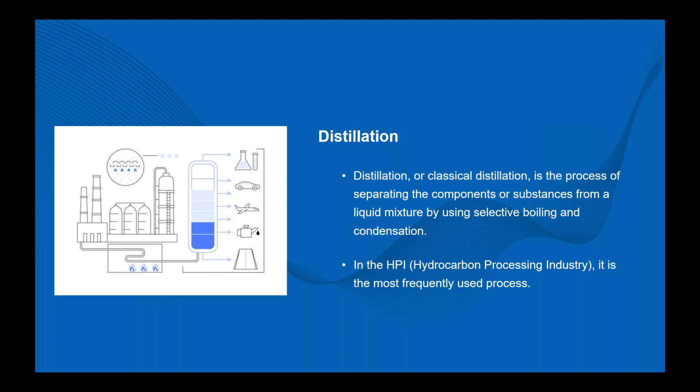It's a separation technology, separating a liquid mixture into more or less individual fractions based on selective boiling points. And if we look at the industry that we focus on, we call that the HPI - hydrocarbon processing industry - oil and gas refineries, test laboratories, etc., then this is the main process used.

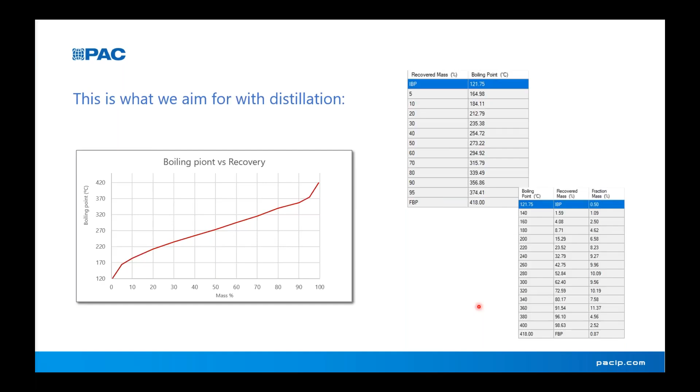If we look into online, then SIMDIS - different ways to write SIMDIS - basically it is simulated distillation. People name it SIMDIS, people name it SIMDIST, whatever, it's all about the same technology where we do a boiling point distribution, determination of that by using gas chromatography.

The concept is based on the assumption that components elute from a column, a GC column, in boiling point order. That's one of the basic fundamentals of chromatography - separating by boiling point is one of the ways of using chromatography.

To get SIMDIS data, you need to introduce the sample in the GC, and we use a specific injector for that, more about it later. Then a separation on a column, detection using a flame ionization detector, and then you need to get a relation between retention time and temperature - that's in the next slide. And from that data, you get the boiling point distribution.

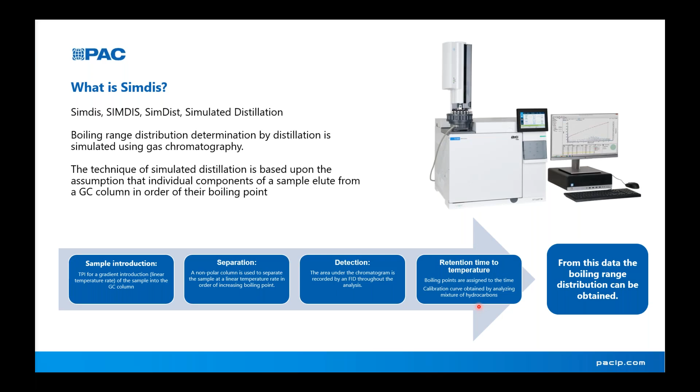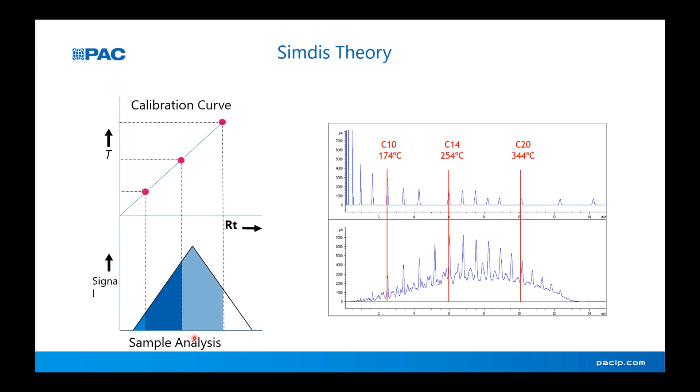So if we relate that to a mixture with normal paraffins where we know the boiling points, like here for C10, C14, C20 as examples, we know when they elute. Then you can change your time axis into a boiling point axis. That's graphically represented here, and then you can change your percentage to retention time into percentage to boiling point. That's the whole thing you want to do in distillation, as I've shown in the earlier slides.

As an example here, a typical SIMDIS report of a diesel with some FAME in there even. So what you see is your sample, and then the retention time - but that retention time is related to the boiling point, and from there you get your percentage versus boiling point. This is the whole concept of SIMDIS: introducing a sample on the GC column where it elutes in boiling point order, and you get the area of that fraction, take percentages of that total area, and relate it to retention time, and from retention time to boiling point, resulting in a report like this.

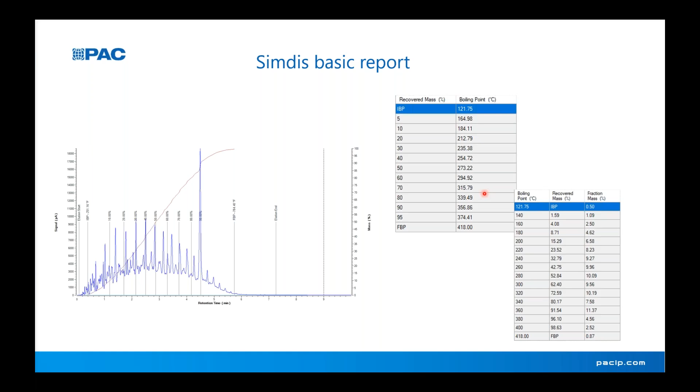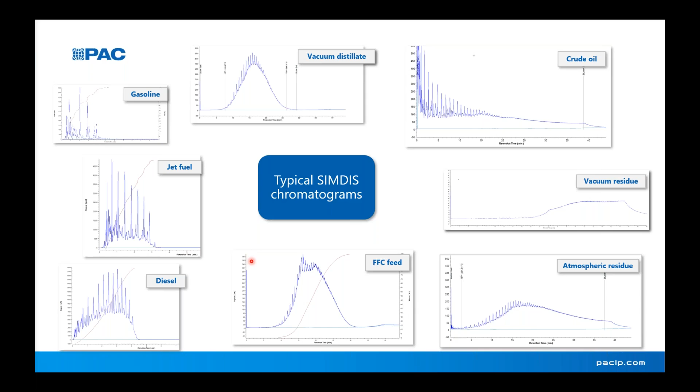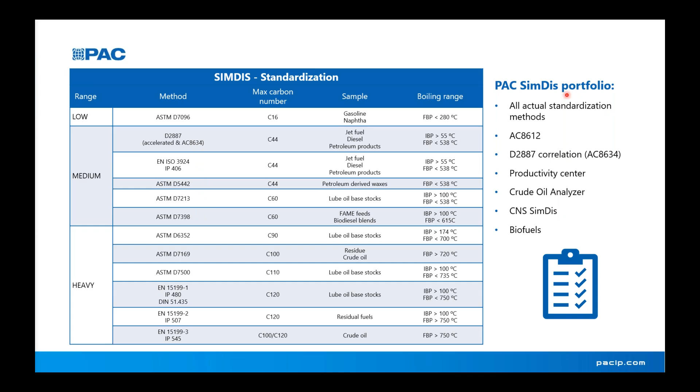Basically the difference is the type of columns used to get the separation of these components - what we call high temperature SIMDIS, typically used for heavier products, and low temperature SIMDIS for lighter products like gasoline or jet fuel. Same principle, the only difference is the thickness of the stationary phase. With a chromatography background you can imagine that heavy components, if introduced on a thick stationary phase, will take a long time to come out, if not too long or not at all. So for high temperature SIMDIS, we use a thin stationary phase, and for low temperature SIMDIS, we use a thick stationary phase. That is the difference between all the methods, and of course the oven temperature programming.

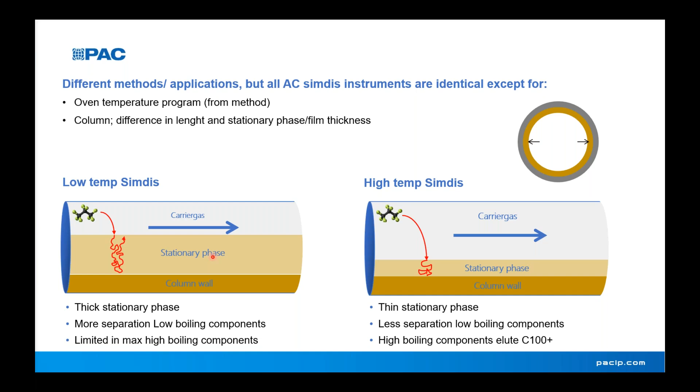Looking at typical columns for that, you see here typical examples of the film thickness for high temperature SIMDIS - a relatively short column with a very thin stationary phase. And for low temperature in the gasoline range, a longer column with a very thick stationary phase, with the mid-range in between.

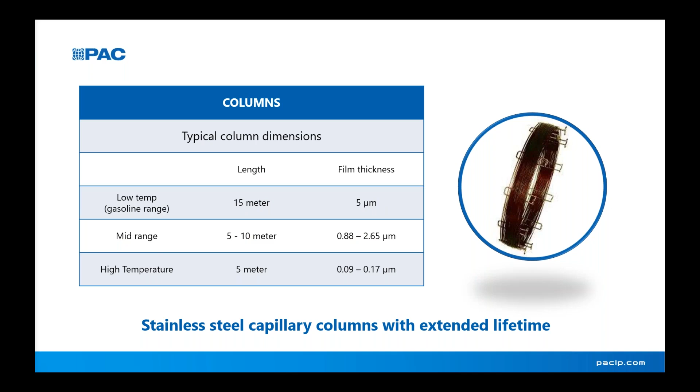To do SIMDIS, what do you need for that? Well, basically three things. Hardware, being a GC with an autosampler for the sample introduction.

The GC is configured with a specific inlet to introduce the sample in such a way that there is no discrimination for light and heavy components, that residual components like asphaltenes stay in there, that it can be used for solvents like carbon disulfide, which is typically used in high-temp SIMDIS. PAC uses for a long time already the TPI, the temperature programmable inlet, which is around for decades already.

Second thing is the non-polar boiling point column, which separates on boiling point, and then an FID, a flame ionization detector detecting what comes out of the column.

Second thing you need is software to process the data coming out of the system. First of all, you need a chromatography data system, that can for example be Agilent OpenLab or Agilent ChemStation. In addition, some dedicated software, SIMDIS, to calculate the boiling point distribution and a whole lot of other parameters from that, and report it as we have seen in earlier slides.

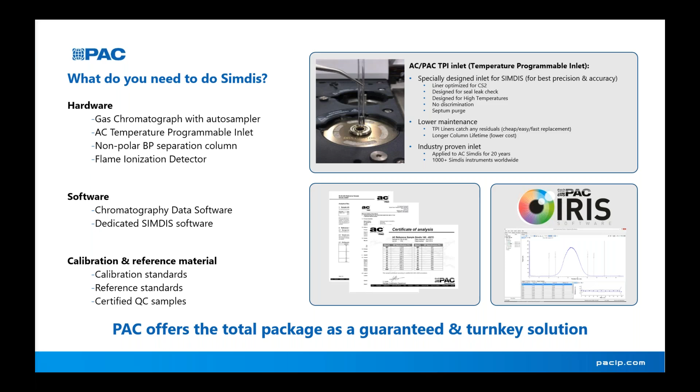Very briefly about the software. It is what we call work-oriented and workflow-optimized software, where basically everything from the moment of sample introduction, which you introduce into your chromatography data system, you start your analysis, and everything afterwards can be done automatically - from importing it in our software, calculating the results in different ways, generating a report either as a PDF or CSV file or whatever, and even exporting the results to LIMS. That can all be done automatically.

If you prefer, you can do these steps manually as well, partly or everything manual or everything automatic. We offer our software as a standalone configuration, so a computer next to the GC, or in a client-server environment where all your data and methods are stored on the server, and you have clients from where you start your sample analysis, process your data, etc. So standalone or a client-server configuration.

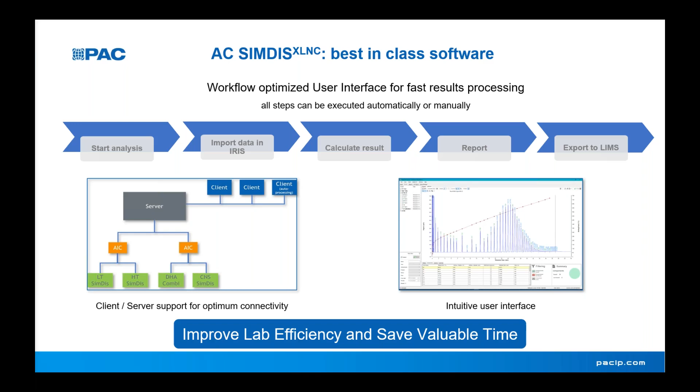So far then about what is SIMDIS. Let's look into a bit more detail about the applications. There are many applications, many ways where and how and why you should use SIMDIS. I'm highlighting 5 of them over here.

The AC8612/34, which is SIMDIS not only reporting the carbon distribution, but also the sulfur and nitrogen distribution. For example, high temperature SIMDIS for residual products like atmospheric and vacuum bottoms. Also high temperature SIMDIS for biofeedstocks and waste plastic pyrolysis oil and all kinds of other bio and petrochemical type applications. And crude oil SIMDIS. Now, these are just a few examples.

We only have, let's say, one hour today, so I'm going to talk about these 3 highlighted here: AC861234, high temperature SIMDIS for residual products, and high temperature SIMDIS for bioproducts and pyrolysis oil. So let's look at AC8612 and AC8634.

The AC8612 is, well, to be honest, it's not a SIMDIS. It is a dedicated application in our DHA, Detailed Hydrocarbon Analyzer, software, where we calculate the boiling point distribution, and that's why I included it in this presentation.

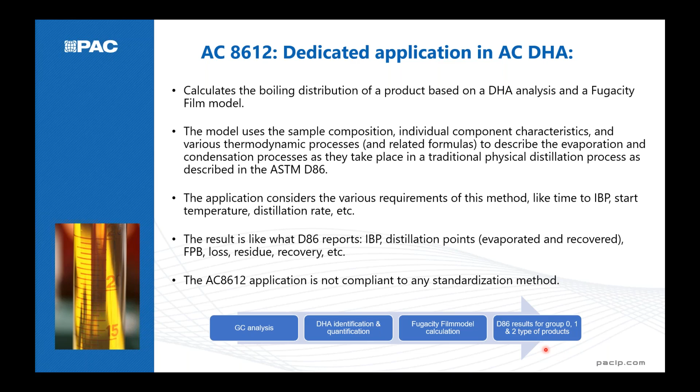To summarize, what you do is GC analysis to separate, identify and quantify the individual components. From that, together with the physical properties and the model, we calculate the boiling point distribution according to D86, or the European equivalent, the 3405, for group 1 and 2 type products, so gasoline, naphtha type products. From that you get the boiling point distribution, boiling point versus volume percent, or the other way around.

You can have certain cut points. You can report evaporated or recovered data, all in volume percent of course. It reports the loss, the recovery, the residue, the Reid vapor pressure, time to recover, the 5 mil, etc., all as requested by the D86 method.

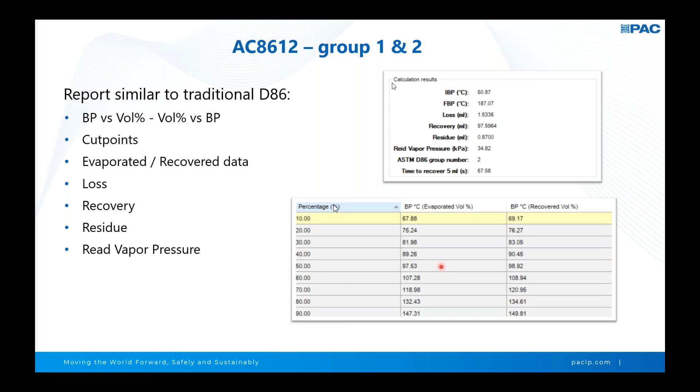There's a comparison to the D86. Here are some results from the 8612 and the D86 data. What you see in this graph, the light blue is from the AC8612 and the dark blue is from the D86 itself. As you can see, there is hardly any difference.

Same for this kind of product, even for a gasoline with ETBE. You see there's a perfect match for the data.

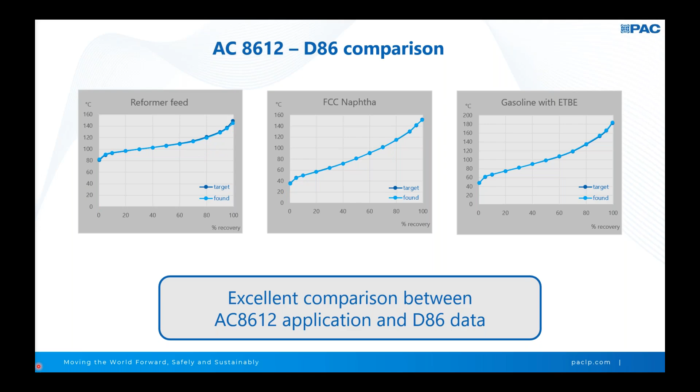The other application, 8634, is different. It correlates SIMDIS data, mid-distillate SIMDIS data, into the D86 or ISO 3405 methods. So it's correlating SIMDIS data, whereas the 8612 calculates data for the composition.

The AC8634 is, well you can already guess, for group 3 and 4 type products, like jet fuel and diesel, and it is based on a correlation as described in the ASTM D2887 methods and also in the ISO methods. There's an older correlation called STP 577, which was updated years ago into this new correlation that we now use in our SIMDIS software.

What you get from that is, I would say, exactly the same chromatogram from SIMDIS and the D86 data based on the correlation with volume percent versus boiling point, also some cut points. What we do not report here is time to IBP, the residue, the loss, etc.

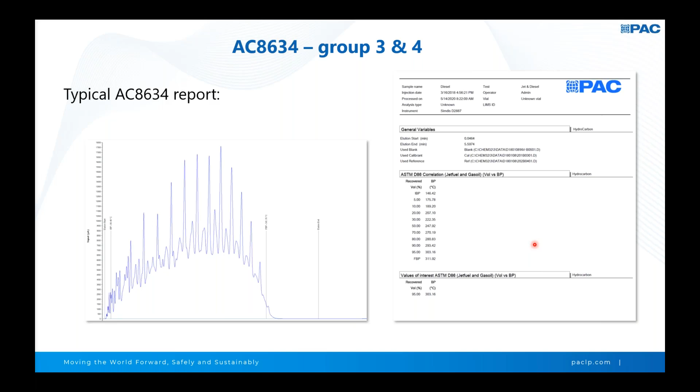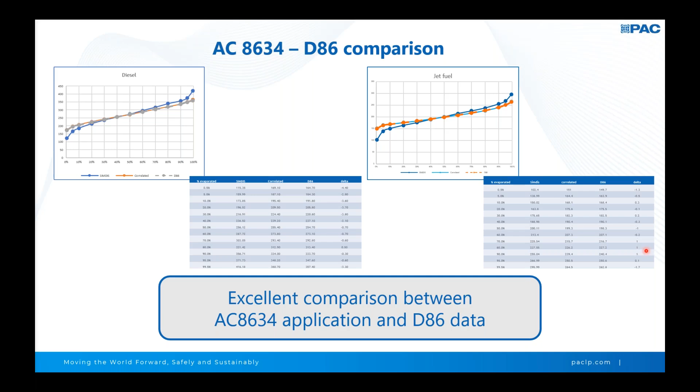The difference might be small numbers, but in general, specifically in the middle, it's less than 1 degree or max 2 degrees. If you look at the jet fuel, you see that it's very narrow. So a very good comparison between the methods.

To summarize these two applications, they are an alternative for the D86 or the ISO 3405 analysis. The nice thing is you can automate this on a GC. You can run a sequence, multiple samples one after another, roughly 4 to 5 samples per hour unattended, versus physical distillation where you continuously have to change your flask and sample, etc. The AC8634 is listed for the jet fuel and diesel spec as an alternative method.

If you look at the jet and diesel spec, you will see that it's saying that the correlation data can be used to certify products like jet fuel and diesel.

Another nice thing is that these two applications can nowadays be combined in one GC, one channel for the 8612 and one channel for the 8634, which gives you a very high sample throughput, far more than what you will get with physical distillation, and all automated.

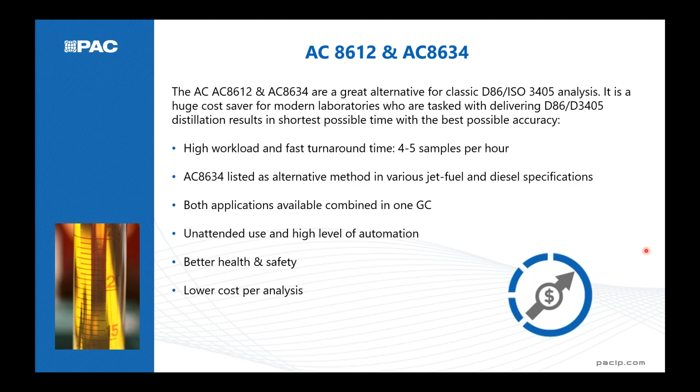Let's go to the next application, high temperature SIMDIS for residual products. You can use high temp SIMDIS for many different products, varying from crude to FCC feed, etc. For the coming slides, I would like to focus on residual products and explain a bit more about that.

But when we talk about high temp SIMDIS, what are we talking about? It covers the simulated distillation analysis of products with a relatively high final boiling point, typically beyond C60, 620 degrees. That's roughly where we say from there on we call it high temp SIMDIS. You can report up to C120, 750 degrees, depending on the methods you use.

It can be that your sample has components with a boiling point even higher than C120 or C100, and that would mean we talk about residual samples, which I'll explain in the coming slides. But the concept is that you only report up to the last point of calibration.

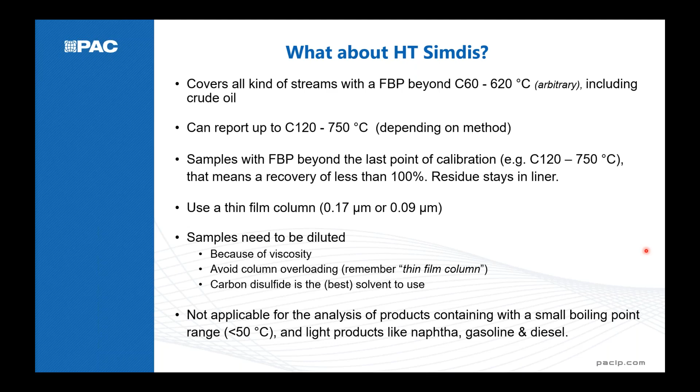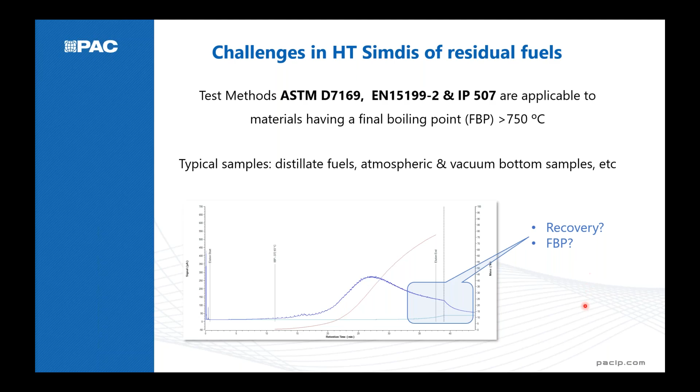What are the challenges with the final boiling point? We said in the beginning that SIMDIS is based on taking the total area and distributing that over its boiling points, over the percentages. But by definition, you will have a start and an end. As you've seen in the previous slide, there is no end - there is still sample eluting at the end of the analysis, although not much, but there's still something coming out.

That means you will not have 100%. By definition, the final boiling point is set as equal to 99.5%. So if you do not have 100%, you typically will not have 99.5% either, so you cannot report a final boiling point. That's the conclusion you draw from this graph and the previous graph. If you have sample still eluting at the end, you cannot report a final boiling point because you do not have 100% of area, and thus not 99.5%.

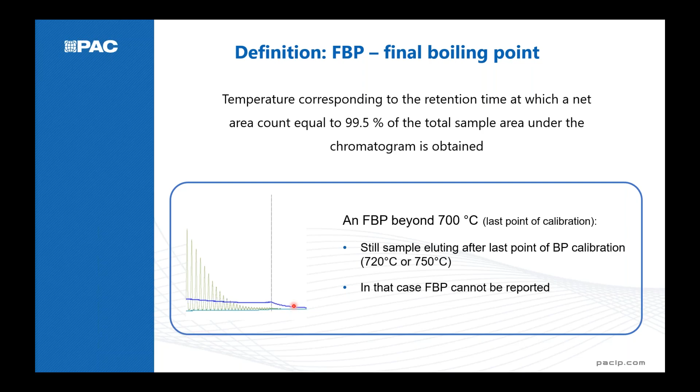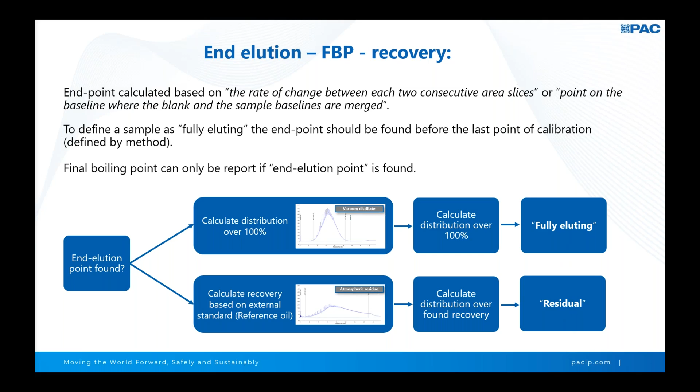To say whether you have 100% is easy - you see an end and then a start, and you take the total area. But if it's not, you need a clear definition of the area, and you do that by taking every measuring point, every area slice from your chromatogram as you've set it in your chromatography data system.

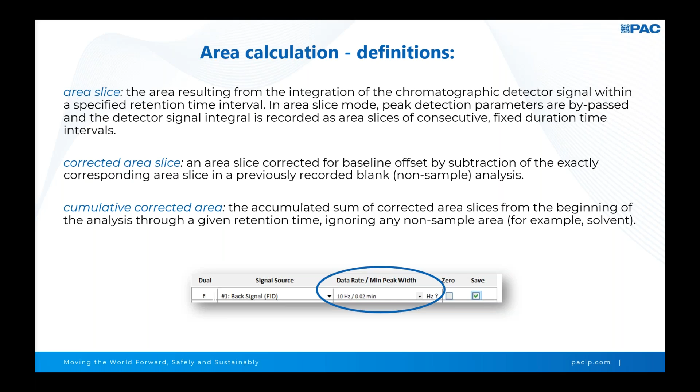Then you subtract the blank from it and you get a corrected area slice, and you add them all up, giving you an area. You compare that area to the area of a reference sample, which is eluted for 100%. That is what these two methods describe.

Basically, the recovery calculation is an external standard calculation where you compare the area of your sample with the area of a fully eluting sample, getting a certain percentage of recovery, and then you distribute your sample over that found recovery. It's all pretty theoretical, but at the end, it's about finding the boiling point distribution for the fraction that has eluted from the column based on the found recovery and the calculated recovery, as you see on this slide.

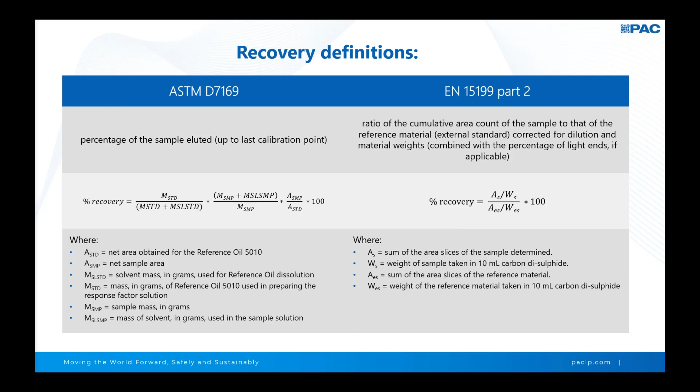A role in that is played by the sample introduction I mentioned with external standards, so it needs to be an accurate sample introduction. We program the inlet and the oven up to 430 degrees C, so the area around the inlet, where the autosampler is located, can get pretty warm. To overcome issues with sample and solvent evaporation which might happen because of that, we use a trick in the autosampler.

We call it the optimized for light solvent autosampler, where we blow cool air around the inlet area, around the sample, keeping it below the boiling point of the solvent. Here you can see a comparison where we measured the temperature in a standard system without the light solvent optimized autosampler versus one with it, where it stays nicely below the boiling point of carbon disulfide.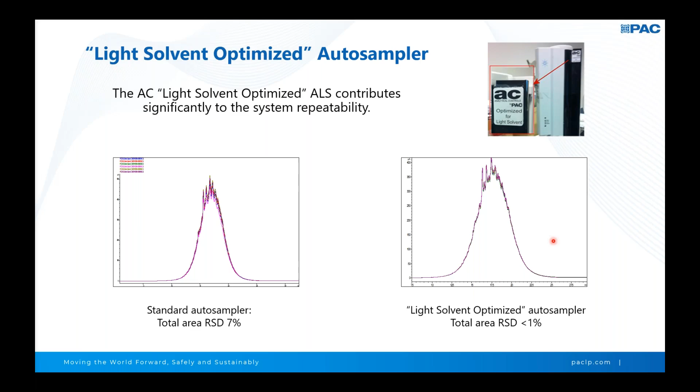Some other challenges around it - in general, you obviously need a good blank, and these are pictures from the methods. You need good clean carbon disulfide, the light solvent optimized autosampler, and you need to make sure your system is well conditioned so that your sample comes nicely back to the baseline.

Inside the inlet of the TPI, your residue, your asphaltenes may accumulate, as you can see here, so you need to replace that frequently. The good thing is that it accumulates in the liner and not in the column, so it's not affecting your separation in the beginning. That's one of the very nice features of the TPI.

You obviously need to do accurate dilution of the sample because you do external standards. You need to make sure the system is calibrated properly with a good boiling point calibration, and the reference oil, which we use as the 100% sample, as the calibration standard for the recovery calculation. And obviously you need a clean system with solvent and waste vials cleaned properly, etc.

So that is about high temperature SIMDIS of residual fuels - challenging, but very much doable, and used a lot. Take care of the challenges listed here: make sure you use an optimized autosampler to avoid evaporation so that you get an accurate recovery, and make sure you do a proper calibration so that you get an accurate recovery. Then the software will take care of a good calculation of the distribution over the found recovery of your system, no matter what type of product you have introduced.

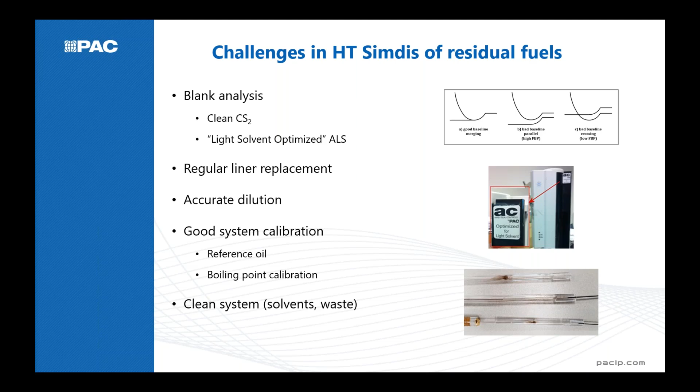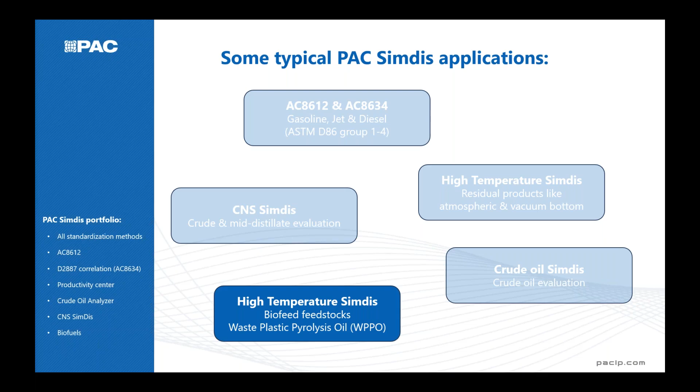As a third application, also based on high temperature SIMDIS, but in a relatively new area: biofuel feedstocks and petrochemical products like waste plastic pyrolysis oil. High temperature SIMDIS can play a role here because there's a large variety of products, from frying oil to many others, and the product quality can vary a lot. There's not much standardization yet, it's still a growing industry in development. We're used to bio components in gasoline and diesel, but not so much in these new feedstocks.

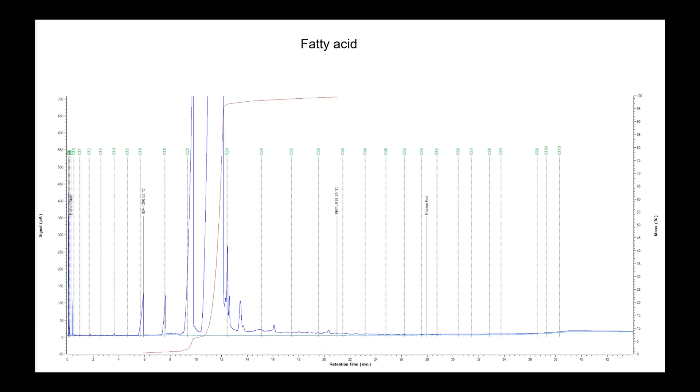Just a few examples of products analyzed on high temperature SIMDIS, different feedstocks like fatty acid products. This may not be the best chromatogram for high temp SIMDIS, but it definitely gives an indication of the type of product - is there a heavy tail at the end, is there a big fraction of light components, etc. The boiling point distribution may not be 100% accurate, but it's useful for trend recording and product quality indication.

Something similar here on used cooking oil contaminated with bunker oil - you see a completely different chromatogram, light fraction at the beginning, some residue even at the end.

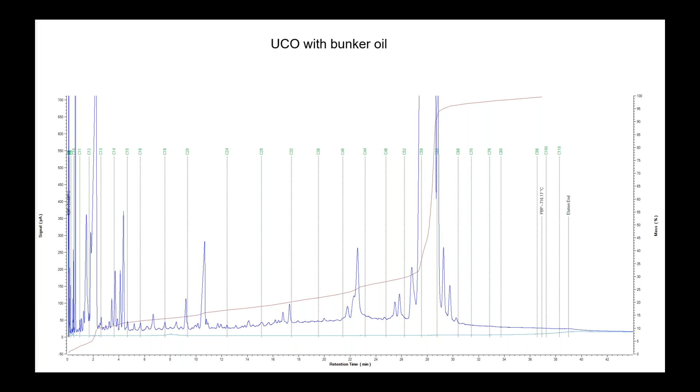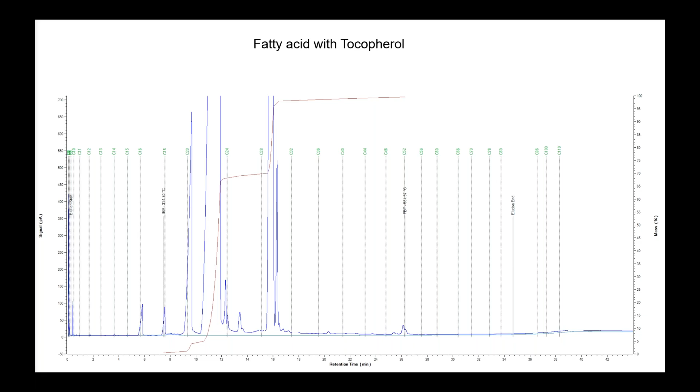And here, fatty acids - I should have shown this one before. This is the standard fatty acids, you see nothing here. If I go to this one, you can see it's contaminated with, in this case, a tocopherol product - you see there's product over here. Again you get the boiling point distribution represented by the red line, completely different than what we're used to with SIMDIS on products like diesel, jet fuel, crude oil, etc. But it gives you the information you may need.

So it gives you a fingerprint of the chromatogram, an indication of product composition - is there heavy product contamination, is there light contamination, whatever. You can build your own database of good products and contaminated products - all kinds of ways to use high-temp SIMDIS, typically as a fingerprint.

To mention, these products do not fit in the scope of the standard SIMDIS methods, as I already mentioned. But again, it gives a good indication of the boiling point distribution, although it may not be 100% accurate. In addition, components found in used cooking oil, FAME, etc. - maybe residuals, acids, polar or oxygenated components - typically stay in the inlet, and sometimes even a bit in the column. So you may need more conditioning than what you're used to in standard high temperature SIMDIS. Biofuel feedstocks can be done on high temp SIMDIS with some remarks as listed here.

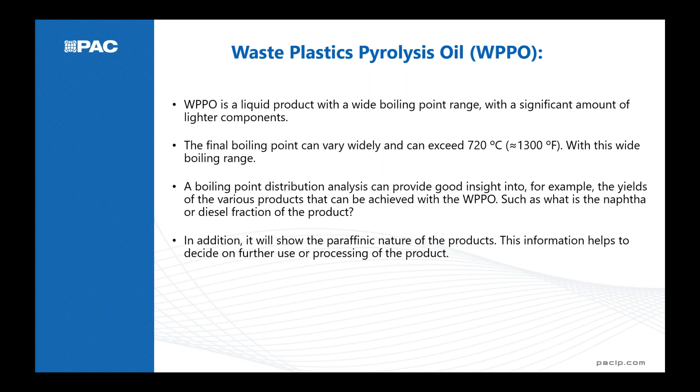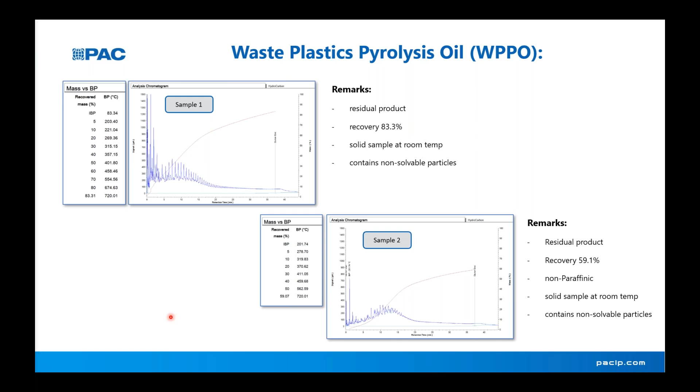We've seen a couple of examples on how SIMDIS can be used, other than the regular things like refinery process control, crude oil evaluation, etc. We've taken these three as examples of what can be done with SIMDIS and why using SIMDIS.

If we go to the market and the economical incentives, SIMDIS can be used for different purposes. It can be used in the exploration part, for crude oil evaluation. For that, you can use high-temp SIMDIS, crude oil SIMDIS, or CNS SIMDIS applications for crude oil. Looking at the refining, the processing part, you can use it for process control and process optimization. These methods are focused on ASTM methods, but European and ISO equivalents are there too, which we can come to later.

And the product specification. The mid-distillate correlation, the HT-SIMDIS, can be used to certify products like jet and diesel. This is the more traditional part of SIMDIS, whereas nowadays, also for petrochemical, you can use it for process and feedstock control. You can use it for naphtha with the 8612, and for waste plastic pyrolysis oil using high temperature SIMDIS, among other examples.

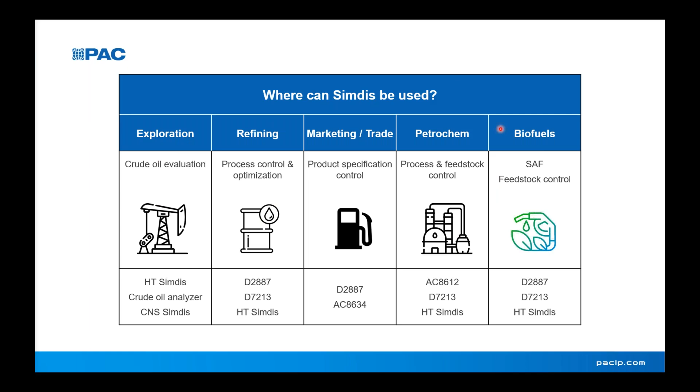And finally, for biofuels with sustainable aviation fuel and feedstock control for bioprocesses, mid-distillate high temperature SIMDIS covers all the places where we can use SIMDIS. We're going to spend a few slides per topic giving a bit more background information.

Let's start with the exploration part, the crude oil. It's obvious that understanding the composition, the boiling point distribution of a crude, can tell you something about how much diesel, how much naphtha, and how much heavier fractions will come out of it. This is of great importance in understanding the value of a crude before you introduce it into a refinery.

Here are some examples. A very heavy crude, the Alba, has a significant fraction of resids and mid-distillates, and relatively light naphtha, whereas the Forties is high on naphtha and far less resids. By doing a high temperature SIMDIS, you get this kind of information.

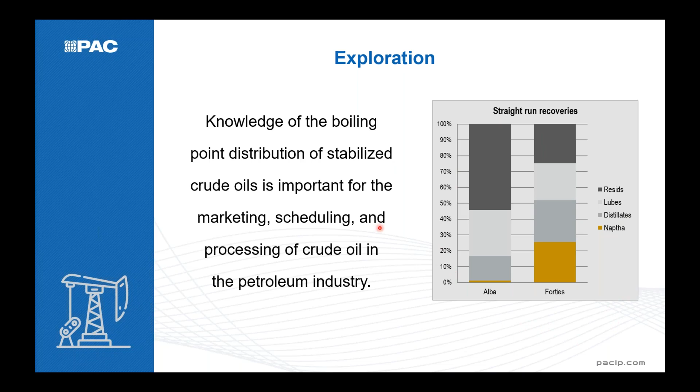We know that in most, if not all, refineries, the crude distillation is the first step in the overall process, where your sample is separated into different fractions. If you know what goes in with a crude oil, you can tune your process to get the biggest amount of fractions with the highest value. SIMDIS, high temp SIMDIS, can help you predict that.

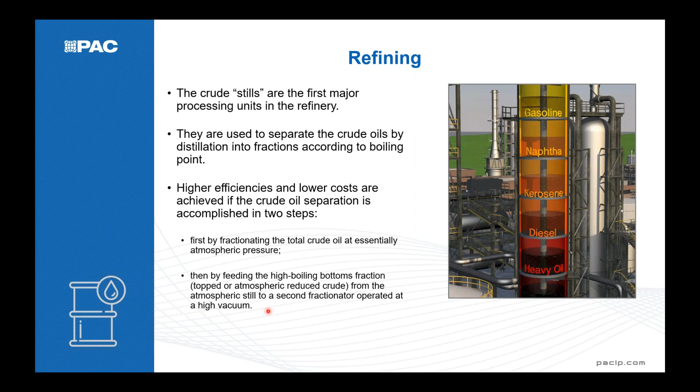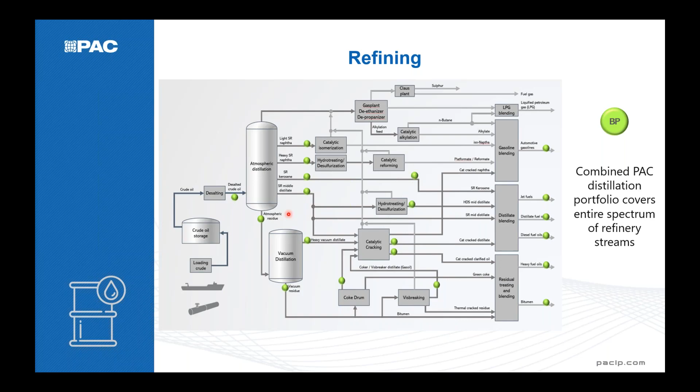Going back to that distillation tower, the optimization of the different cut points is obviously related to the price of the various products, for a mid-distillate, kerosene, naphtha, or whatsoever. Some products have a higher value where you want to extend your recovery from that fraction to get the most out of it. By knowing this information upfront, SIMDIS can help you.

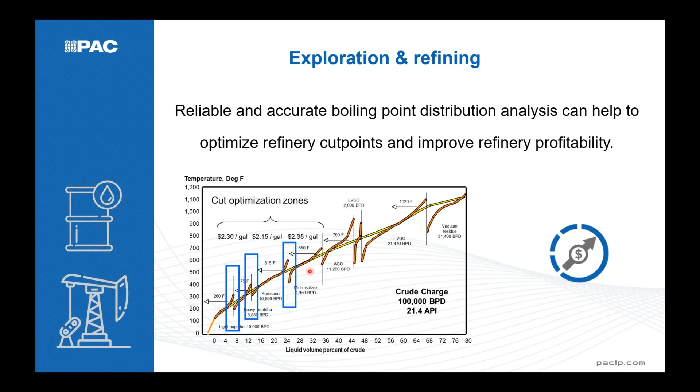If we go to the markets, the trading of various products like gasoline, jet, and diesel, there are obviously specifications for that. For Europe, when we talk about gasoline, we talk about the EN 228. For jet fuel, typically the DEF STAN comes into place, and for diesel, the EN 590.

Having the referee methods, which is physical distillation, but for jet and diesel, as already mentioned, the correlated data from SIMDIS can be used. It's listed in the fuel specs that these methods can be used. There is even another PAC product complying with this method, the OptiPMD, which is also listed as an alternative. Focus here was on jet fuel and diesel, where with the 8634 you will get the correlated data according to the methods used for fuel specification.

If we look to standardization, it's a method that typically gives you a repeatability and reproducibility that the system should comply with. And everyone can say, yeah, we comply with the method, etc.

But what we as PAC, Analytical Controls, have done many years ago already, we have organized a performance monitoring program, a kind of interlaboratory study where we analyzed 60 plus samples, sent them to customers like yourself, who analyzed the data on a SIMDIS, returned it, and from that bunch of data we get a repeatability. You see here in blue, and graphically in blue, which is for all points better than what the method is asking.

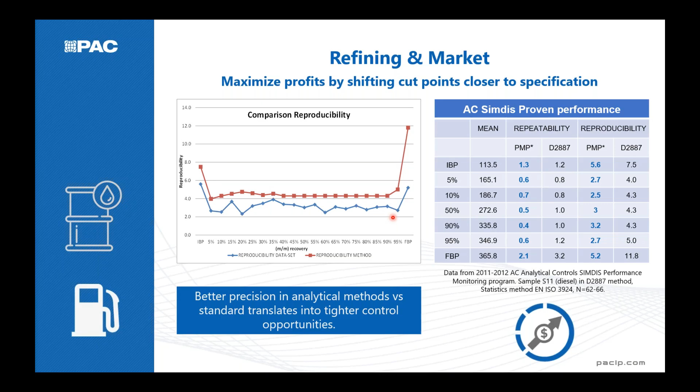As the next one, we move to the petrochemical. I mentioned about the waste plastic pyrolysis oil. That of course has all to do with the amount of plastic waste that is floating around the world, literally floating in the oceans or at places like shown over here, with a lot of plastic - 10 billion tons of plastics.

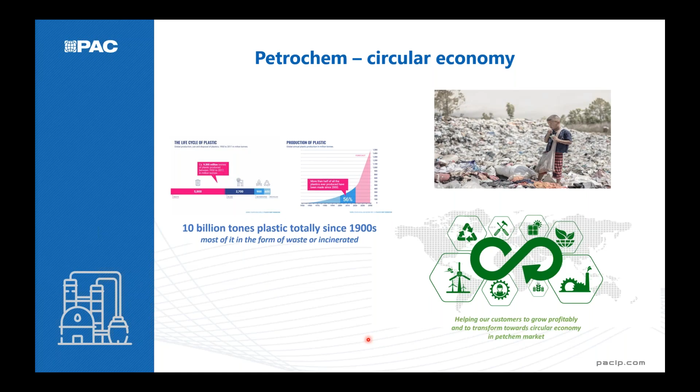And what obviously the market is looking for is to reduce this, the political situation is that we want to get rid of this waste and so on. One way of doing that is to process the plastics and produce products which can be used for something else.

And here comes the waste plastic pyrolysis oil into the picture, where plastics are cracked under low atmosphere, and you get an oil which can be used as a feed for either a steam cracker for ethylene or propylene production, or even fed into the refinery process and so on.

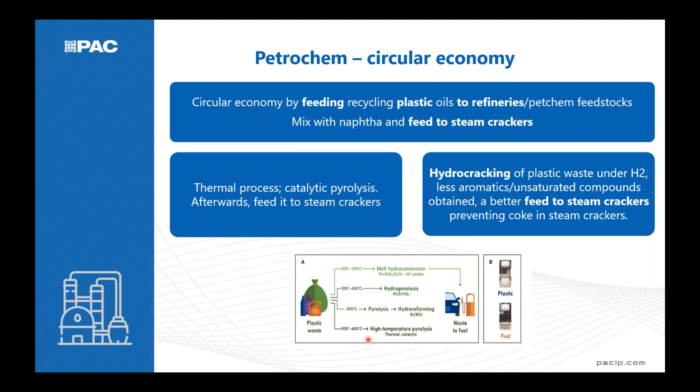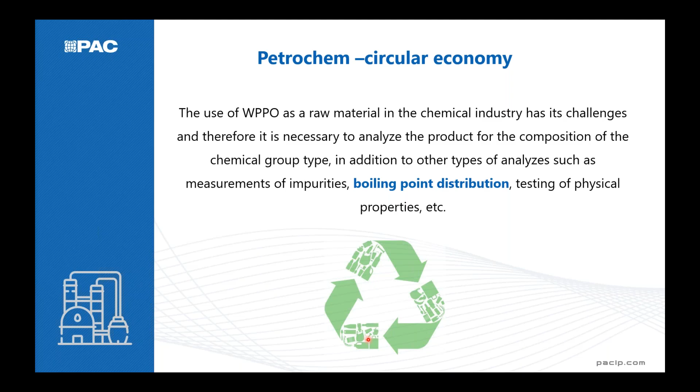For that, you obviously need to know some characteristics of the waste plastic pyrolysis oil. One of them is the boiling point distribution, as we have seen before in the few examples that we have done for a specific customer. Boiling point distribution is one, but also analysis of group types or physical properties, etc., is something PAC can offer.

If you look to the pyrolysis oil, it benefits, of course, leading to a cleaner environment, reducing the fossil fuel demand, having a sustainable process, and so on and so on.

And SIMDIS can play a role there by analyzing the products, the pyrolysis oil, and giving an indication of the yield for the various products that one can get out of that pyrolysis oil. In addition, it shows the paraffinic nature, which can be used as valuable information as well.

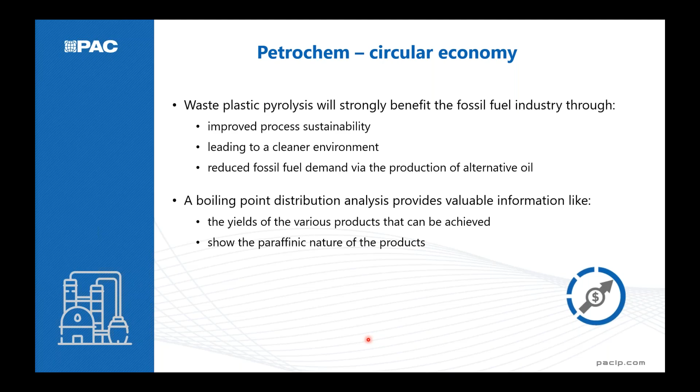That's about the petrochem. If we go to the biofuel - 30 years ago, 40 years ago, nobody talked about bioproducts. Over time, we have seen that bioproducts got a bigger role in our industry. We saw the oxygenates getting blended into the gasoline, we saw the FAME get blended into the diesel, and so on.

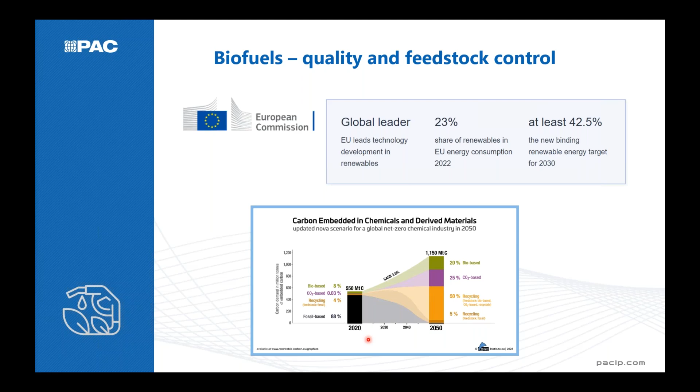And the European Commission has put a statement here that from the renewables, 42%, or from the feed used, 42% should have a renewable background. And that can be all kind of things.

That can be from cooking oil, that can be from the use of sustainable aviation fuel, that can be vegetable oil, that can be all kinds of products. Just a few examples listed over here.

And at the end, when these products or the processed products are blended into the final products, you of course have your final product specification, like for jet fuel, diesel, and gasoline. But when we talk about the feedstocks, the quality of the products may vary a lot.

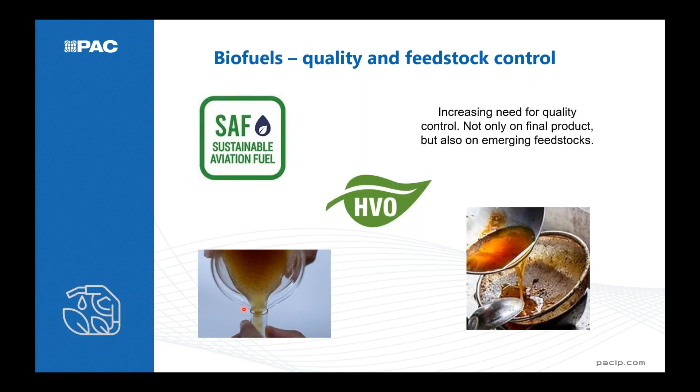As you can see here as an example, this is from a frying pan, and this is another type, more waxy components probably. Analyzing the quality of the feedstock is important, of course, and this is a new industry where companies - just an example here, oil recoveries, but that's just for the picture - come and collect all kinds of products.

And for the processing, one wants to know what is in that truck, what is in that tank, what are we going to process, what is the value of it, and what can we expect from the final process and the products getting out of it. Is there any contamination, etc.? Everything where SIMDIS can play a role by analyzing those products, as we have seen before in a few slides.

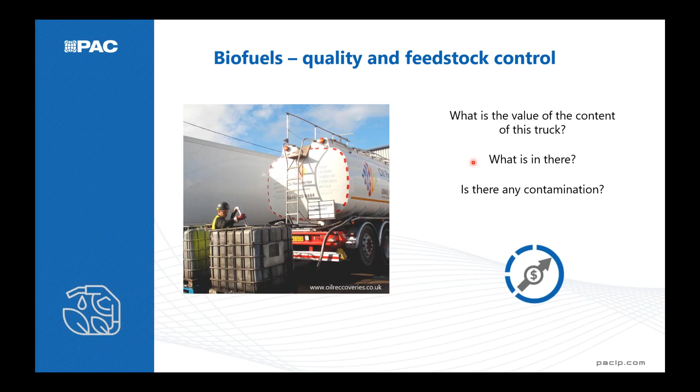Well, that brings me to the end, more or less, with the conclusion.

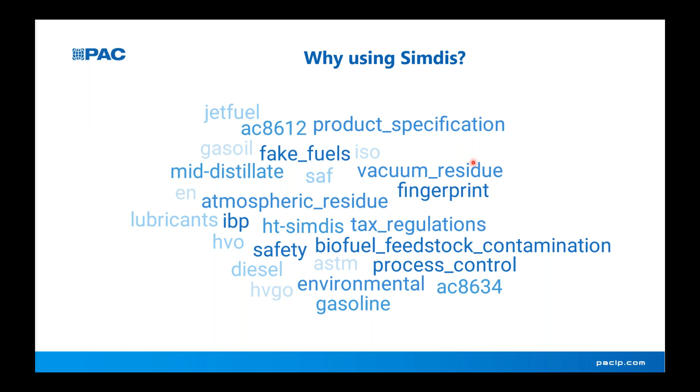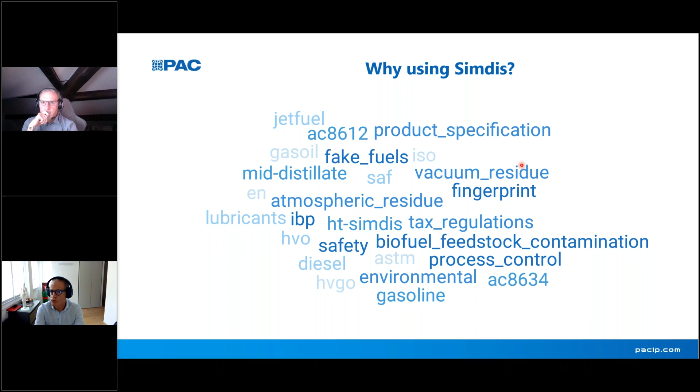Why using SIMDIS? There can be many reasons for it: product specification, process optimization, tax regulation, biofuel contamination, process control, lubricants, you name it, all kinds of reasons to use SIMDIS, or where SIMDIS can add value to the product in the overall processing and use of the products.

And finally, two more slides. When we talk about PAC, we have the comprehensive distillation portfolio from gasoline up to crude oil, with extensive scope, not only simulated but also physical distillations. Systems have set a standard, like the crude oil, for example, which was initially developed based on PAC products. We have a huge installed base, we play a role in standardization, and of course we have the huge application knowledge which we use in supporting our customers.

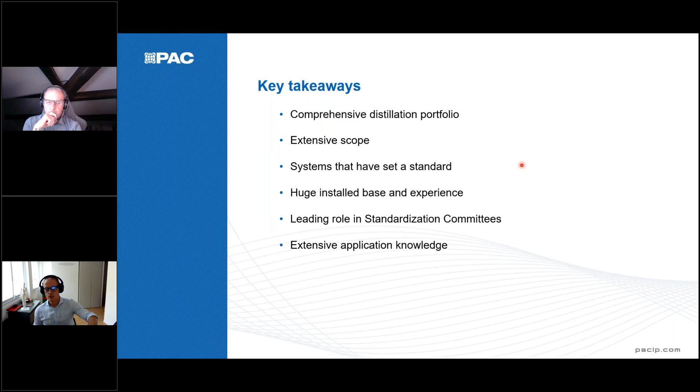And at the end, like listed here, we have the whole range of distillation portfolio, and whatever need, whatever requirement you have, we always do the best to offer you the best solution for simulated distillation.

Brings me to the end. This is the end. A lot of information, maybe a lot of details, but it was there to highlight the options, what can be done with SIMDIS. And I'm sure there will be some questions, and feel free to ask them, put them in the chat, and we can do that in Italian, do it in English, up to you.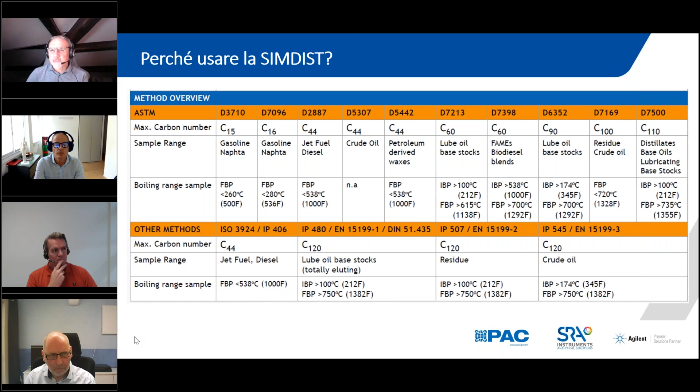In the meantime, Theo, a question about carrier gas, helium for sure, but there are also other carrier gases that can be used. Yeah, this is one question, and sorry, the second question, it's about the cryo. We know some methods describe the cryo, so when are they necessary, when not, a little bit of clarification.

Okay, thank you. Question 1, carrier gases. Yes, typically traditional helium is the gas to be used. What we see is, of course, and everybody knows that helium prices go up. It may be a challenge to get it nowadays, and so on. So looking into alternatives, nitrogen, hydrogen might be optional carrier gases, and some of the methods are listing those as a gas, as optional carrier gas. If you want that, that can be done. We offer that option.

Might be that the method is asking for a kind of minor bias correction on the results based on that. So the answer, yes, it's doable to use other gases. Take a careful look at the method and how important is method compliancy. You can imagine that for the biofeed products there is no reason at all, and for the residual samples etc., because that's typically a process stream and not a final product. So standardization does not play a big role in those products. Look at the methods, do you need to comply? Check what is in there and switch to the other gas, and we can support you with that.